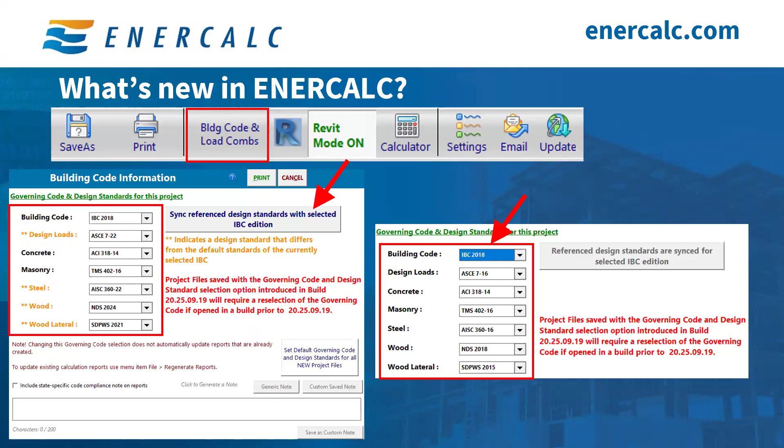Now keep in mind, all of the code changes we just talked about will only apply to the calculations within that specific ENERCALC file. If you want to apply this code selection as a default for all future projects, you will need to click on this button, which says Set Default Governing Code and Design Standards for all new project files. If you click this, you'll get a window showing the old default values and the new default values.

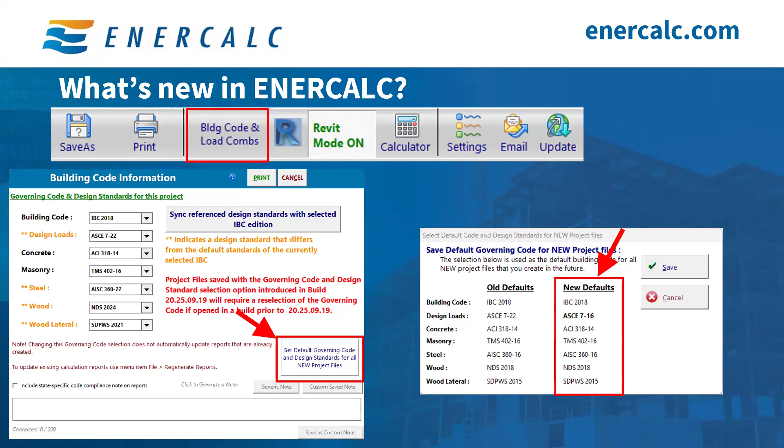For example, it used to be ASCE 7-22, that's the old value. The new value will be ASCE 7-16, and so forth. So if this is the new default you want to use for future projects, click on save, and that will confirm the selection and ensure this is the default governing code used for all of your future projects.

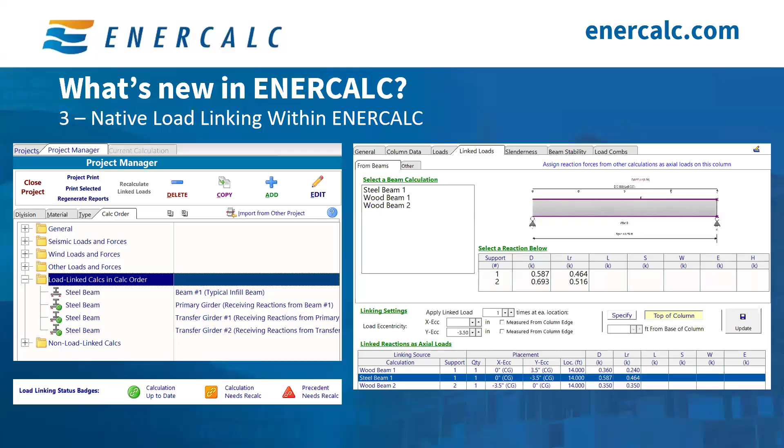Another update that's been really useful is the ability to export tabular detailed results from ENERCALC to a CSV file. This has been useful to a lot of engineers who want to post-process some of the results outside of ENERCALC. All you need to do is go to the results that you're interested in.

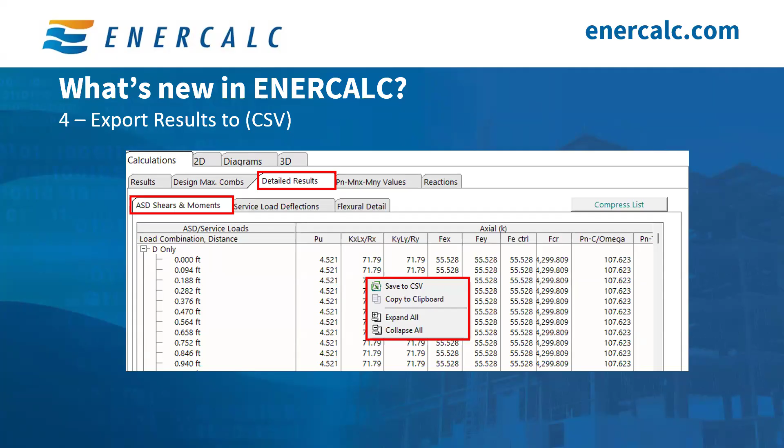So for example, you can click on detailed result, ASD shears and moments, and you just right click anywhere here and it'll give you the option to save to CSV to your computer. And once you have that downloaded to your computer, you can post-process it however you see fit. And this is available practically in all of our modules: columns, beams, slender walls, shear walls, foundations, and of course all of our analysis modules.

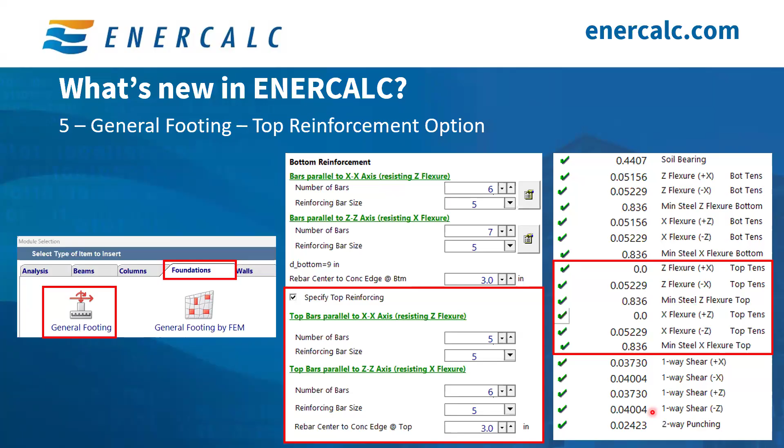So you can pretty much specify your reinforcement in the long direction and the short direction, both top and bottom, for a greater level of flexibility. And of course, on the right-hand side here, the calculations and results are displayed. You can see that we have expanded this quite a bit. So when we say Z flexure, it's top tension or bottom tension. This will make it a little bit easier for you to identify what type of reinforcement you need to increase or decrease and see what controls your design.

We also recently added full support for ACI 318-25. A few jurisdictions already started adopting ACI 318-25, including Georgia, I believe, in January. We're seeing this happen more often now, where a jurisdiction adopts a certain IBC edition and then handpicks newer editions of certain design standards. So you might be on IBC 2015, but the local jurisdiction wants to adopt ACI 318-25, for example, or ASCE 7-22. So again, with the mix and match we talked about earlier, you'll have a great level of flexibility to make sure that your drawings and calculations remain compliant with the authority having jurisdiction over your project.

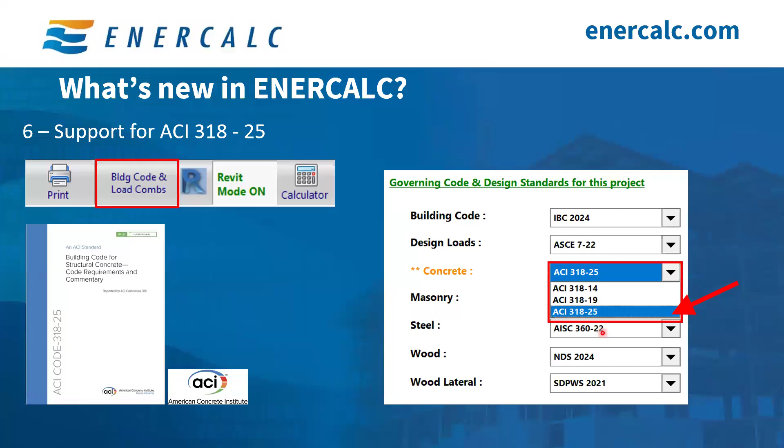But yeah, it's a very simple process. Again, you click on the building code and load combinations button right here, and you choose the ACI edition that you want to use for your project. And if 318-25 is the one that you've got to use, then you can simply select it from this drop-down menu.

With every new update to ENERCALC, we send release notes to outline what changed, what got updated and what got fixed. This gives you a quick idea about the top changes, so you can take advantage of the new features, know that certain bugs have been fixed, and maybe new capabilities were added. So this will give you a quick idea of whether the new build has some significant changes or maybe minor changes. So that's an easy way for you to keep track of that.

So moving on, the focus of our session today is the load linking feature and how you can use this powerful feature to link reactions from one calculation to another to form a well-connected and dynamic chain of calculations that follow the proper load path and reduce transcription errors, and more importantly, reduce the time wasted on manual entry of loads.

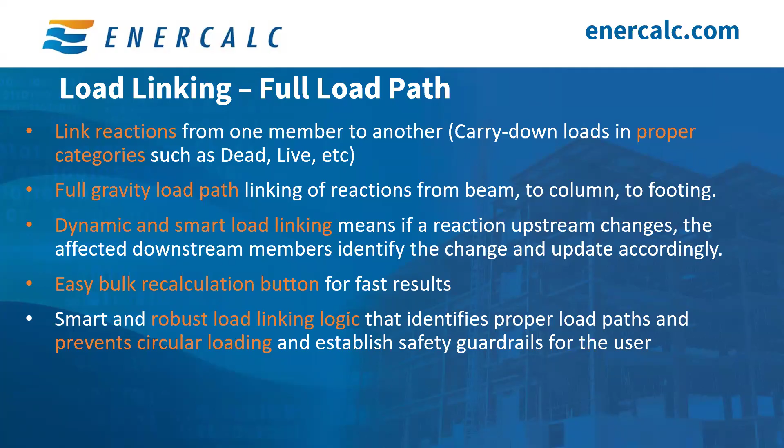Smart and robust load linking logic that identifies proper load paths, and this is very important. It prevents circular loading and establishes safety guardrails for the user. So it's not like you're taking a reaction from a beam, you put another beam, and then you're just going into this endless cycle of one beam supporting another with complete disregard to physics.

So with that being said, I want to take you today into an example that would showcase how this feature can be useful and how it can be implemented in your daily workflow. So the objective of today's session is to learn how load linking can help you manage tedious framing. The objective is to learn how useful and extensive the load linking feature is in ENERCALC, with the goal of you walking away with enough information to implement load linking effectively in your design workflow.

So we will not be focusing on how to create a new beam calculation or a new column calculation, etc. What we're going to be focusing on is how to use the linked loads tab inside each one of these calculations and how to link those reactions together. So first, I want to set the stage by walking you through the sketch so you have an idea of what we're trying to accomplish.

So on the left-hand side right here, we have steel girder number 1. This steel girder supports reactions from steel beam number 1, and it supports reactions from wood beam number 1. On the right-hand side, we have wood girder number 1. This wood girder supports wood beam number 1, but the wood beam now is really more of a joist at 24-inch on center. So that is the right-hand side of the equation here.

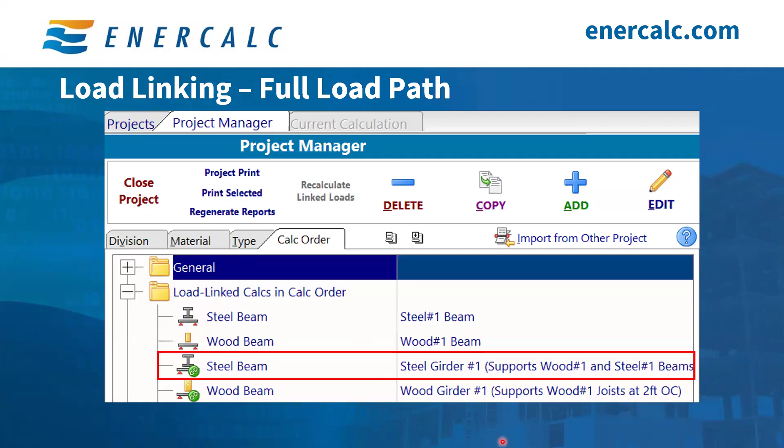So let's go ahead and open up the steel girder calculation to see what it looks like. This is a screenshot of the steel girder calculation specifically under the linked loads tab. You're going to find this tab in all of our calculations today, because that's where all of the linked reactions, or the load linking, happens.

On the left-hand side, you see a list of all of the beams that you can grab a reaction from. You can see here the first steel beam. You can see a wood beam right here. You can grab reactions from all these guys. On the right-hand side, you will see a 2D sketch of that selected beam. So I selected steel beam number one. That's what it looks like.

That's the loads on it. This is support number one. This is support number two. And you can grab whatever reaction you want. However, if I click on this wood beam right here, this sketch will actually update. Look at that. This sketch completely updates and it looks different. And the reactions are different.

So this 2D sketch is really helpful for us to jog our memory, figure out which reaction we want to grab, and make sure that we're actually grabbing the right beam. You can find the same style in all of our calculations, where there is a list of members to grab reactions from, and a sketch that helps you identify what you're grabbing and how to link it.

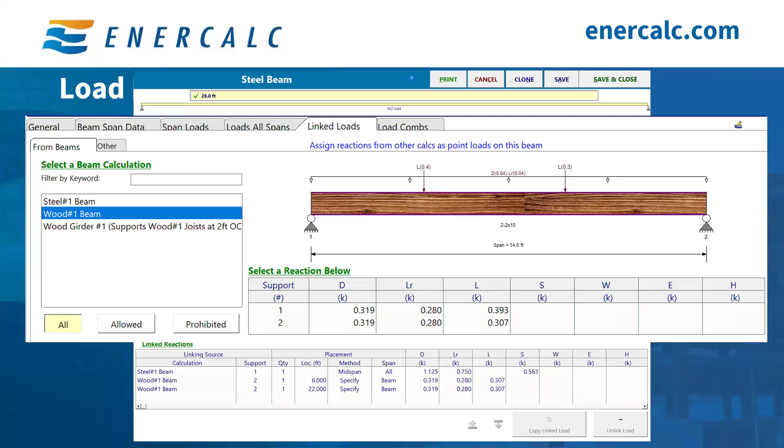So anyways, back to the girder design. We want to make sure that we're grabbing the steel beam here. And if you look at the very bottom right here, you have something called linked reactions. This is a table where all of your linked reactions live. It shows the source of each linked reaction or each linked load, and it shows how each load is applied.

So for example, the first load right here, the source of the first load is steel beam. You can see here that the method of placement is mid-span, which makes sense. We said that we have the first steel beam applied on the steel girder at mid-span, and then the second and the third, those are the wood beams, and their method of placement is a specific location. The first one is at 6 feet, and the second one at 22 feet.

And again, this makes sense. This is what we have here. The first piece is at 6 feet, and the second load, which is from the wood beam, is at 22 feet, and the steel beam load is at the mid-span. So that makes sense. All of the reactions have been linked properly, and you can see them right here that they have been linked and tabulated.

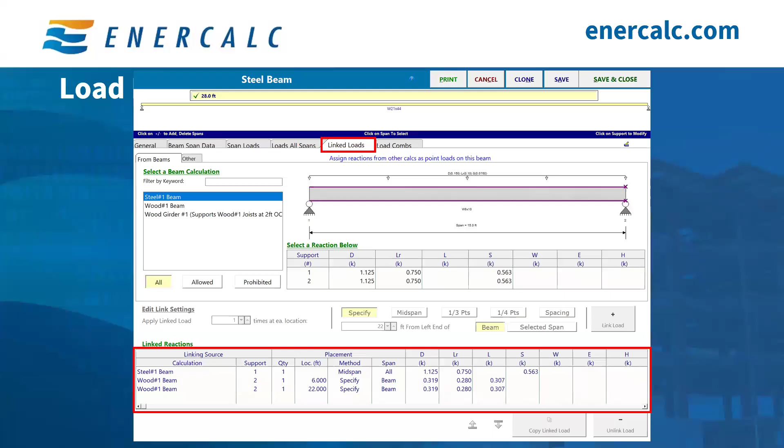And you can see that each linked load comes in as a full set of loads, which is the dead, the roof live, and if it has snow and so forth, or if it has floor live, all of that will be right there for you. So moving on now from the steel girder to the wood girder, which is practically the same thing. It has wood beams spaced at 24-inch on center. So let's take a look at what that calculation looks like.

If you open the wood girder calculation and you click on the linked loads tab, you can see here that we already linked; the source of the load here is wood beam. That's the first wood beam. And the method of application is spacing, and that means this is spaced. If you look at it, we have it starting at 0, and then the load repeats itself every 2 feet. And that makes sense because we have a joist at 24-inch on center.

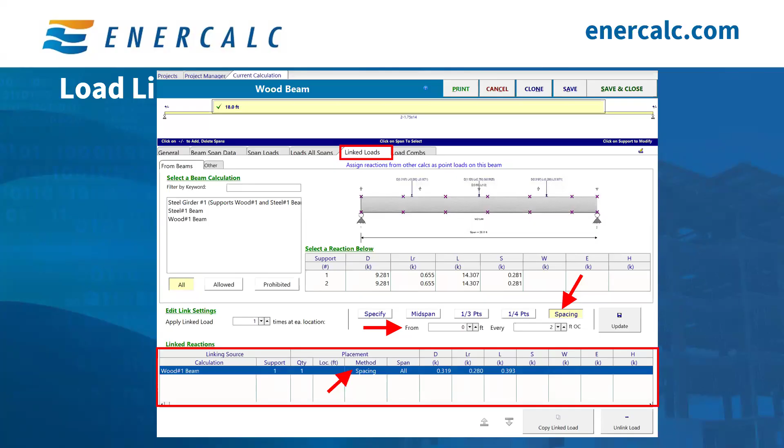So now we have linked the reactions from the wood beams directly into the wood girder at a 2-foot spacing interval as shown in here. Now that all the reactions have been linked into both girders, and the girders have been designed, you would go through your process, design what that steel girder looks like, design what that wood girder looks like, and you're done and you save and close. Now you are ready to work on the column, and that is the next piece right here.

So now we want to establish those links between the girders and the column. Again, the column is a 6x4, and it's oriented this way. And it has a lateral out-of-plane wind load of 4 kips, and it's at 9 feet above finish floor. So if you open the steel column calculation and click on the linked loads tab, again, the same theme, you will see a list of the beams that you can link a reaction from.

So we see all the beams that we have in the project, and we can grab a reaction from whichever we want. The list is shown on the left side, and on the right-hand side, you'll see the sketch. At the very bottom, you will see the already linked reactions right here. So the first source is the steel girder, and you can see that we have applied that load at -3 inches in the x direction. That's the x eccentricity, and it says edge. That means it's 3 inches from the edge of the column, not the center of the column.

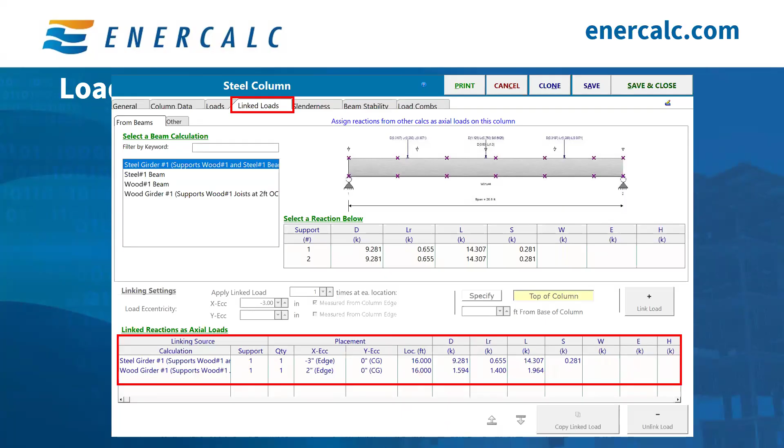So I always like to go and look at the 2D tab and sometimes the 3D tab just to see the visual representation of the load application. So for example, if you click on the 2D tab for this column, you will see the reaction. This is from the wood girder right here, and it says linked load. This is not a manually applied load. It says linked load, and it's at 2 inches away from the face in the positive direction.

And this one here, the reaction from the steel girder is at -3 inches away from the face of the HSS. So this visually looks great, and we're a lot more confident now in how the load got applied.

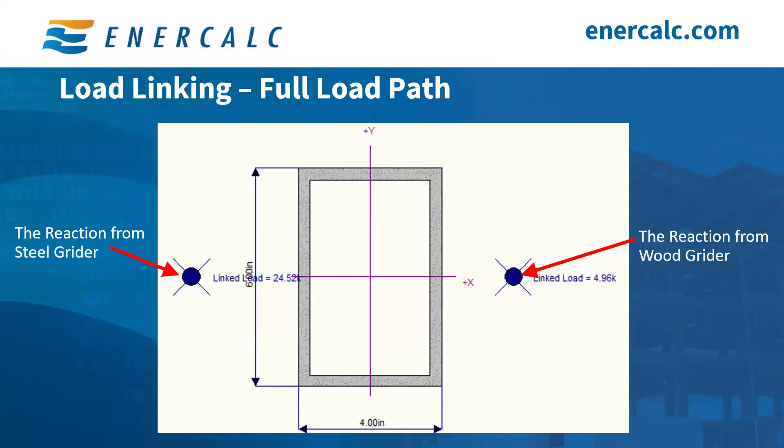Next step is to manually apply the 4 kips wind load, the out-of-plane wind load that comes from the wind girts. And I'm showing you this to let you know that you can mix and match. You can manually apply loads, and you can also have linked loads. So it's not like if you use linked loads you can't have manually applied loads. You can mix and match and do whatever makes your workflow easier.

So for this one, we don't have a calculation for that wind girt, but I know that the wind girt will apply 4 kips of wind load at 9 feet above the finished floor. So it's a simple process. You click on the loads tab, then you go to lateral loads because that's what you're trying to apply. And then from the drop-down menu, you need to pick the load type. Is it uniform load, partially uniform, and so forth? In our case, it's a point load.

I always encourage everyone to put a description of where that load comes from. I'm just saying lateral load from wind girt, but this is always a lifesaver for anyone who comes and reviews your work. They'll know the source of these manually applied loads that you're bringing in, and then of course you enter right here 4 kips for wind load, and then it asks you how that load is applied. We're saying it's out of plane, and based on the orientation that we have for this example, it's going to be parallel to the y-axis, and again 9 feet above finished floor. So we are good to go there.

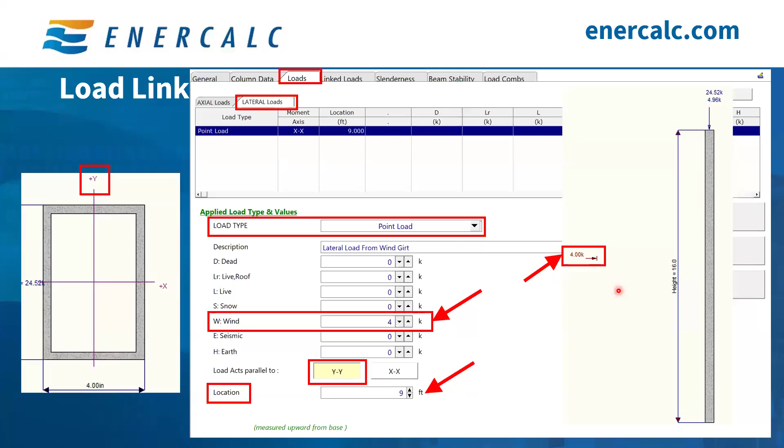And you can see here again, I went to check under the 2D tab. I was able to see the applied loads, and this is looking at it from this side, where you can see here the point load that's being applied. You're looking at it from here, and you're seeing the point load is applied horizontally, which is this one right here.

So now that we applied all the loads to the column and the column has been designed, again, you go through the rest of your typical process and you design the column, assuming that 6 by 4 works. And we are ready now to move forward to the footing. So we want to start a footing calculation and we need to link the reaction from the column to the footing. ENERCALC allows you to link the axial reaction from the column as well as the lateral reactions in both the x and the y directions, so the shear in the x and the y directions.

And of course, if you had any base moments in the x and in the y directions, all of these reactions are allowed, and ENERCALC links them. So this is a full reaction transfer, which unlocks the full potential, of course, of the general footing module that ENERCALC has. So in our case, again, it's a 6 by 4, and keep in mind the long dimension is like that.

So this is the 6 right here, and the 4 is the short dimension right here. If we open a new general footing calculations and go through your process, your soil bearing allowables, and you go to your footing data and all of that stuff, then you get right here.

We're focused today on linking loads. If you click on the link loads, you will see on the left-hand side a list of the columns that this project has. Currently our project has only one column, so that's why you're only seeing one right here.

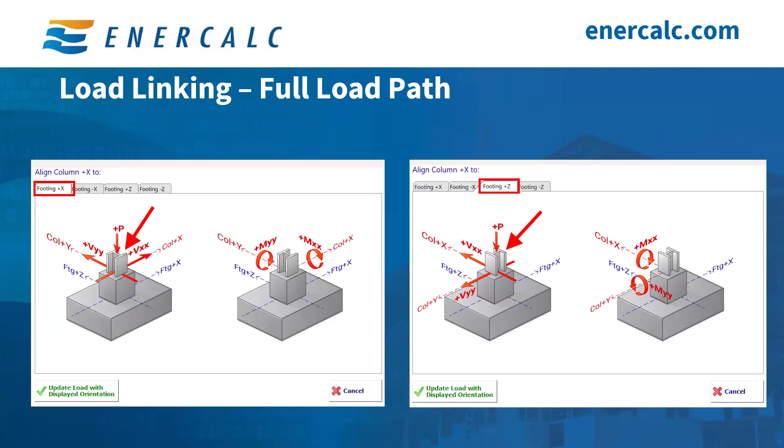It's very intuitive once you see these sketches. Once you get used to them a little bit, you'll be able to orient the column and the footing correctly. More importantly, you have the 2D and the 3D footing sketches that will always serve as a sanity check for you to make sure that you have everything oriented properly.

So for us, we're going to go ahead and move on with the footing plus X orientation. This means that the footing X dimension right here needs to be 6 feet, and this needs to be 4 feet. This makes sense now that the 4 kips wind load that's applied in the Y direction is right here.

It acts as a shear in the y direction, so that is perfect. Now, one more thing to note here: if you're experienced with ENERCALC, for columns we use X and Y as the directions. But for footings, the labeling is X and Z directions. This lays them on top of each other so you can reconcile them. As far as the X's, they're the same, and the Y is really the same as the Z direction.

They're positive Y or positive Z, they're exactly the same. So now that you have a good understanding of the orientation, we're good to go and can move forward. Just make sure that you remain consistent with whatever you end up choosing.

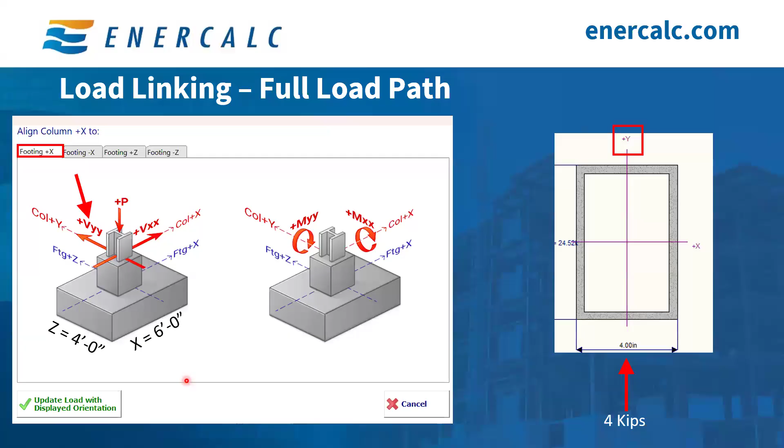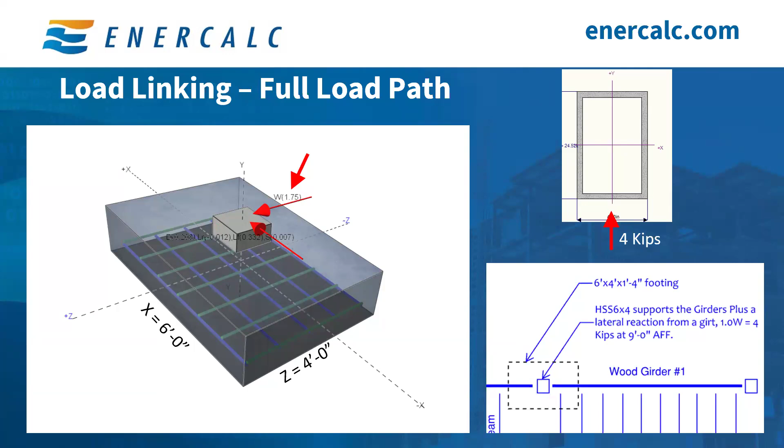For another sanity check, I recommend checking the 3D tab to see the 3D representation of the foundation. You can see right here, this is the 6-foot dimension of the footing, this is the 4-foot dimension of the footing, and this is the application of the wind load, the point load, which is accurate. It's pointing in this direction, towards the positive Z direction. So again, that tells me everything is proper and we got everything oriented correctly the way we want it.

So now that we have a fully connected chain of calculations from the first most upstream beam to the girders, to the column, to the foundation, your work here is done and you're good to go.

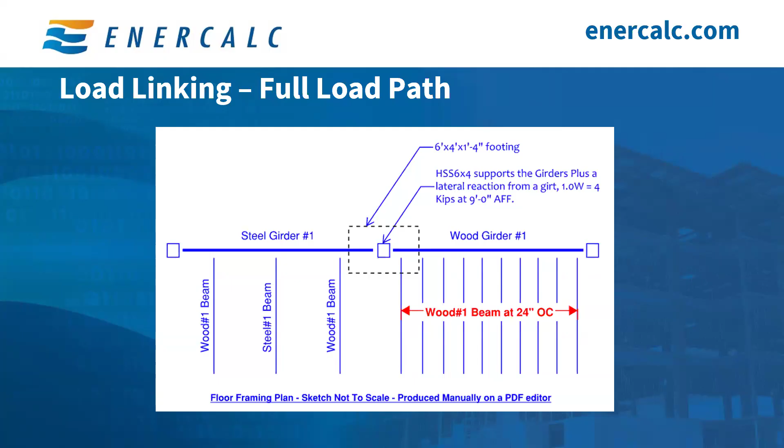But sometimes, maybe a few weeks down the road, you realize your work is not really done, and now you need to design the wood beam to take a heavier dead load. So that means things are changing. If this wood beam is now taking different loads, then the wood girder is changing, the steel girder is changing. Well, that will affect your column. So now your column is going to change and your footing now is going to change.

And this change doesn't mean that you have to change sizes. This change just means there's a change in reactions. You will have to go through it again, reevaluate it, and see if that warrants a size change or not. This is an extremely tedious and manual process. However, ENERCALC makes this a much more manageable, and dare I say, simple and fun process by using load linking.

So as soon as you change the loads in the wood beam, ENERCALC flags all the affected members. Once you change this, all of the affected members downstream will get flagged.

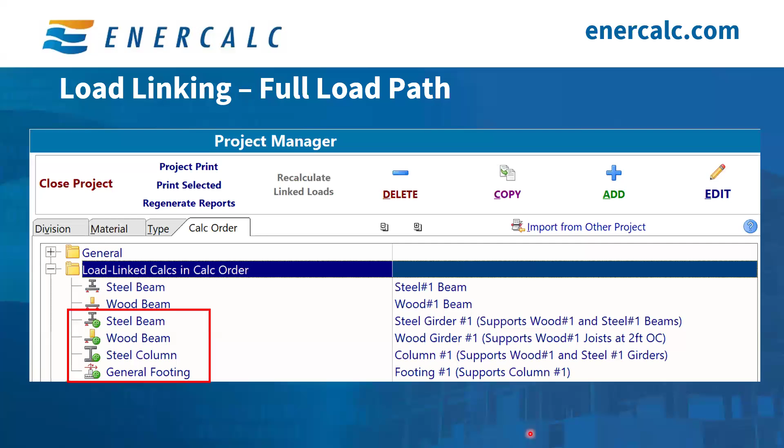You'll have to make sure that it still works. But at least you don't have to worry about tracking the different reactions, what changed, and carrying it downstream. This green indicates that your reactions are linked and up to date — you don't have to worry about outdated information or outdated loads. You will still have to be responsible for checking the member design and member safety.

So in summary, load linking is such a useful and time-saving feature that allows the user to live link the reactions from one member to another. Currently, ENERCALC load linking is supported in wood beams, steel beams, wood columns, steel columns, and foundations.

Our implementation of load linking is truly a reflection of what our users told us. We keep track of how many times a feature is requested, and we prioritize our development efforts based on the demand we receive from our users. This is why I want to encourage everyone to take this short survey to let us know where we should implement the load linking feature next.

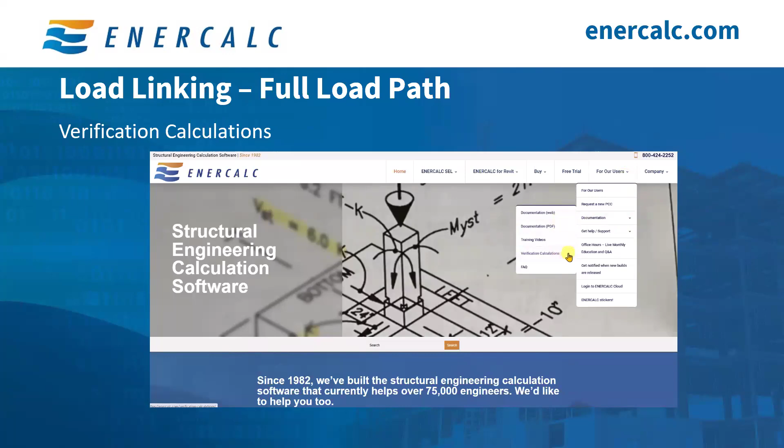So you click right here, and then verification calculations right here. We will continue to update this page with more verification examples as we produce them. You can see that we already have about 6 verification calculations for 6 different modules.

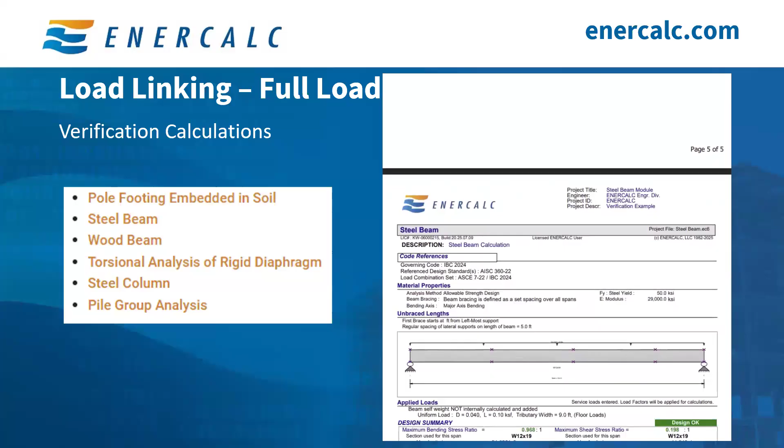We made that available on our website. This will help our users check our design and make sure that ENERCALC performs as well as expected: compare the hand calculations based on the ENERCALC report results and make sure that everything is to their liking. These verification calculations can also serve as a great learning resource for young engineers and a quick refresher for those who need it. We plan on continuing to add more verification calculations to cover more modules as we go.

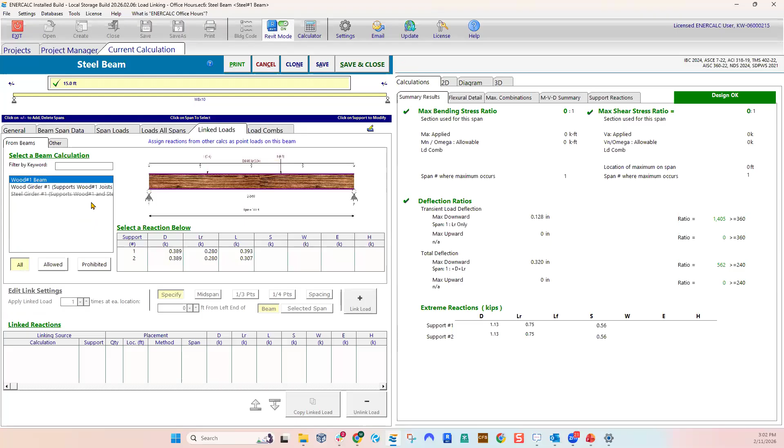The only reason steel composite is not supported right this moment is because of the sequencing issues that go into composite, because you have pre-composite, post-composite, and all of that. It's not the same low-hanging fruit that your regular beam modules are. And so in our development work, we prioritized beams that don't have that extra complexity in the loading. That's not to say it's not going to be supported in the future. Good question. And Mac is showing you guys that survey right now.

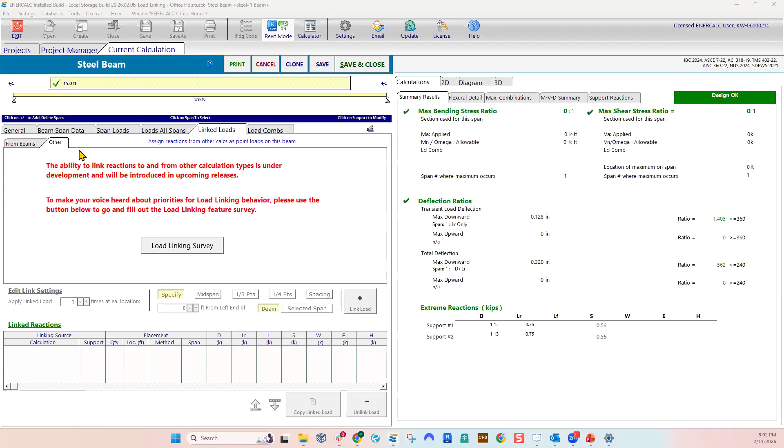All right, next question. When a beam reaction is changed, do the downstream members update automatically, and will the downstream calculations be flagged if they now fail? So hopefully Mac touched on this topic for you and got you some clarity on this, but I'm going to let him go ahead and revisit this in real time in front of us here.

Yes. So you can see here everything is green. And again, green means that the reactions that we have linked are all up to date. So if I go to the wood beam right here, and if I change the load, let's say I'm going to change this dead load to 20 instead of 25, and I click save and close.

And what happens is that you will see that ENERCALC will automatically flag these calculations because all of these calculations, from our example, they're all dependent on this wood beam right here, on the reaction from the wood beam. And you can see that we have the statuses right here.

This means that the calculation needs to be recalculated, and that means just the preceding member, which the wood beam here is the preceding member that changed. And the steel column and the general footing, they're saying that there is more than one member upstream that is affected by this change. So you'd have to fix them one at a time.

You can fix them one at a time by opening each one and doing the work, or you can just click on this right here, which is perform a bulk recalculation. And what it does, it will rerun through the logic, figure out what changed, grab those reactions downstream and apply them. And then finally, once it goes through all of them, it will turn everything into green.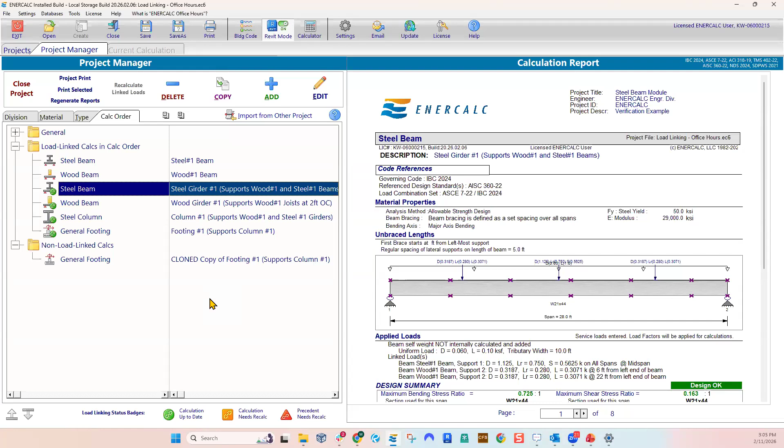All right, next question. While doing load linking, do we need to add dead load and live load in span loads? So I'm not 100% clear on what's being asked, but there's a couple different ways we can approach this. When you perform load linking operations, as Mac showed us today, the load has to start somewhere, and that often comes from a beam calculation all the way at the top of the load path that doesn't have any linking on it, but its reactions become the source that you then link downstream.

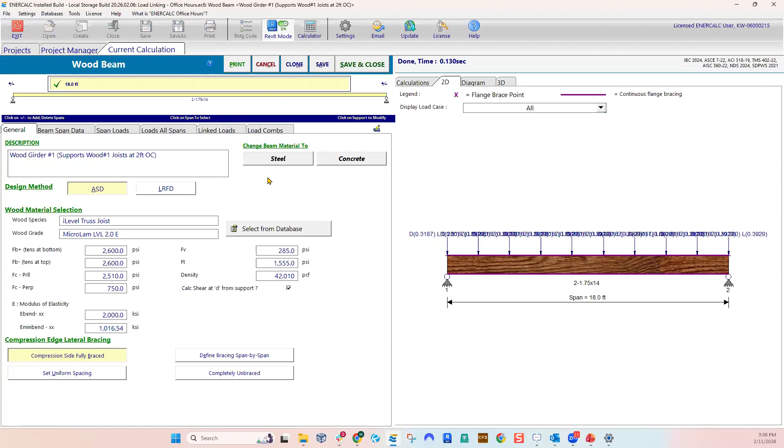So the calculation at the very top of your load path is going to have to be loaded manually. That can be done through any of the conventional means you've always used in ENERCALC calculations: your span loads tab, your loads all spans tab, and so on. You also have the option to auto add your beam weight to account for dead load. Then the reactions generated from that calculation, which you would have formerly transcribed manually, can now be transcribed automatically by going to a downstream calculation and linking those reactions.

So feel free to ask a follow-up question if there's something we haven't answered for you. But Mac, go ahead if you want to take a shot at addressing that particular question. Yes. To make sure it's clear, you have this wood beam and you have a wood girder. The load that's applied on the wood beam is a manually applied load. The load that's applied on the wood girder is linked load from these wood beams.

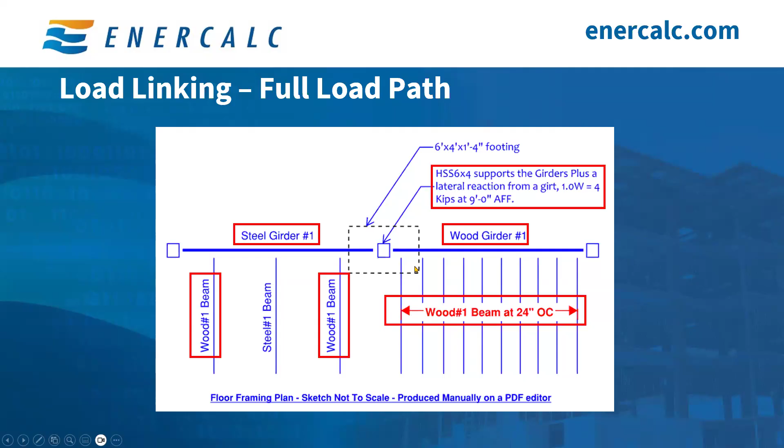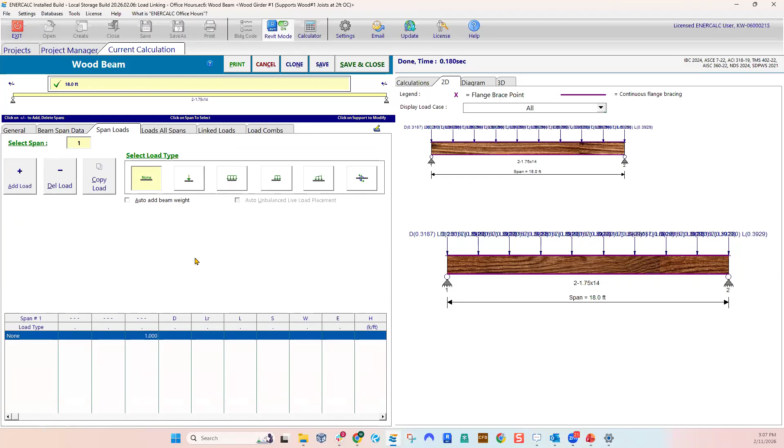So with this in mind, if you go back, this is the wood girder right now. All of the load that you can see here comes from load linking. As you can see, in span loads I have nothing, and in loads all spans I have nothing. I'm not saying that you can't have something, you can, but I'm just not adding anything here. All of that load comes directly from the linked reactions from those joists.

However, now let me go back to the wood beam, and that's the most upstream member. If you click on this one, it doesn't have any linked loads because this is the first member. Nothing is linked to it, so that's why there's nothing here. And that load comes directly from the manual application that we're typically used to. So that's how I have this. The first member has manually applied load, and then the rest of them just have linked loads or linked reactions.

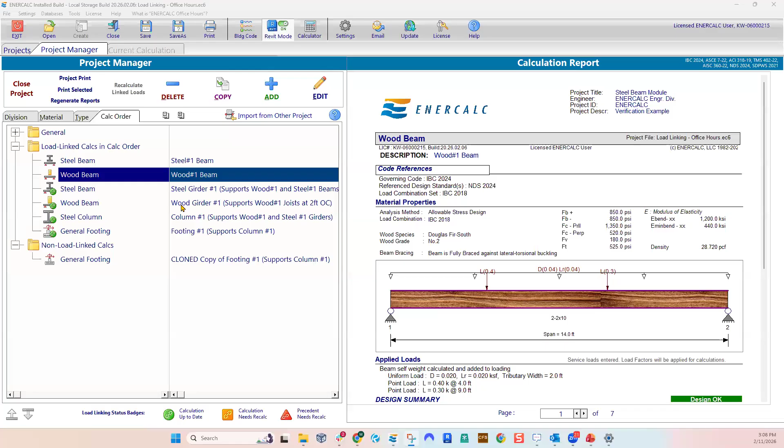All right, next question. Could you develop something similar as you did in the linking load search box? Ahmed, I'm not 100% certain on what you're asking there, but feel free to ask a follow-up question if there's something we can answer for you there. Mac, I believe you did briefly cover the use of the load linking search box for keyword search for easier navigation of your linked loads. Yeah, and I can actually go through it. Here, let me go through it because it's a great feature to dwell on for a second anyway.

Yes, absolutely. So nobody has a calculation for a whole building that just has two beams, or most of the time that's not the case. Most of the time you have 10, 12, 13, 15, even more calculations, and sometimes the names all become the same, or it's kind of hard to navigate.

So for example, this list right here only has three, but if I specifically want the wood beams, I can just type wood, and now that'll show up here, saying this is right here and this is right here. I can do wood number one, beam, and now it's filtered. So if you have 20, 30 calculations, 20, 30 different beams, for example, you can easily just filter by keyword right here to make your life a lot easier. Fantastic.

All right, next question. When choosing governing code, should load combination directly sync with it so I don't have to do it manually? This is a classic example of a 50-50 design decision where ENERCALC has to try to be as helpful and as neutral as possible, because workflows and opinions typically tend to divide down the middle with those kinds of things. And so we don't want to overly couple those settings, because it's not 100% true for us to assume that all users want load combinations to follow the governing code around everywhere it goes. Mac, if you have anything to add on that, go ahead, or we could briefly visit that window if you have thoughts.

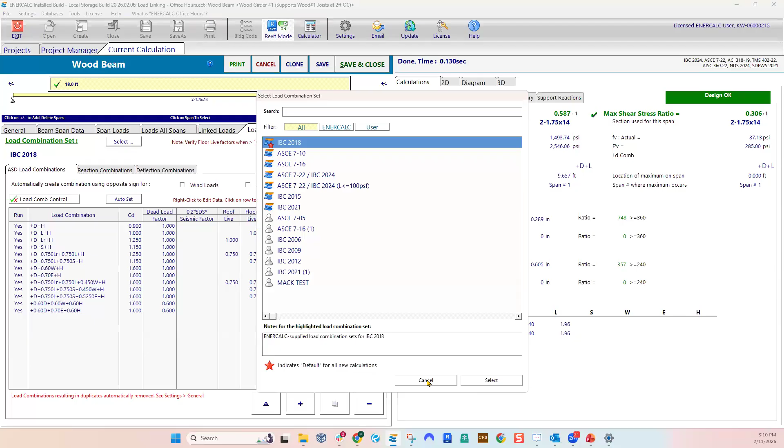Yeah, and just want to make sure I understand. They're talking about the ability to control load combinations separately inside here, as well as a default value, correct? Well, they're saying why doesn't load combination automatically sync with your governing code, basically. Yeah, it's a flexibility thing, I think. Exactly, I agree with you. It's 100% a flexibility thing, because if it does sync and then sometime you want to change something very specific to a specific calculation, maybe a different set of combinations, if we lock it up here, I think we'll get complaints about that.

Absolutely. All right. Now, I just want to briefly mention, ladies and gentlemen, that we are in the presence of greatness today, because the one and only Michael Brooks is in attendance in our office hours session today. For those who don't know, Mike is the founder and creator of ENERCALC. He's the father of ENERCALC, and we owe an awful lot to Mike for all the amazing work he did over the years. So everything you guys enjoy today, we're standing on the shoulders of giants, because Mike created ENERCALC from nothing and made it what it is today. So thanks for dropping in, Mike. Great to hear from you.

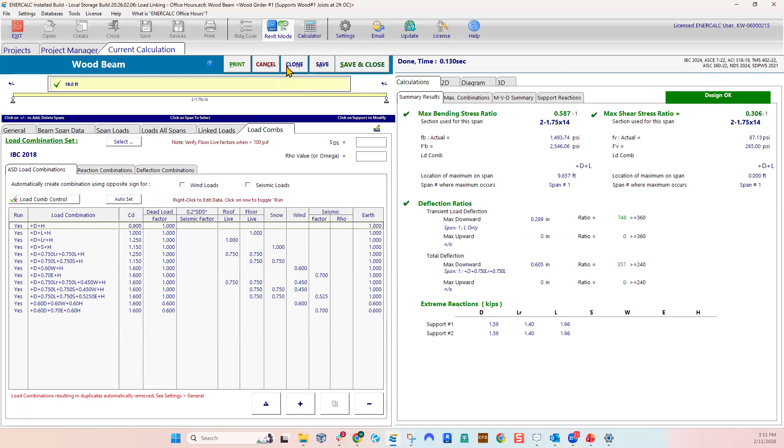All right, next question. How can we submit a request to separate linked load member options by division? So as always, I know we mention this from time to time in each session, but you can always send us a feature request. Support at enercalc.com will get you to our engineering team to log those.

It sounds like in this case you're talking about additional ways to view or separate what's going on in the project manager. Right now we have just the original three ways that you can view, and then we have the calc order tab. So it sounds like you're talking about the ability to break out by divisions and then rank each individual division by linked load order or something of that nature.

Feel free to reach out to the support team if you have more detail about what you'd like to see there. Go ahead, Mac, if you had something to add. Yeah, I'm not sure I fully understood the question, other than just kind of separate them, I guess, in divisions. Yeah, that looks like it's more of a feature request.

All right, next question. Why not show that a member... Oh, go ahead, Mac. Sorry, I want to get back to one thing here because I want to make sure to touch on this with load combinations.

So if you're working, for example, on IBC 2024, or whatever IBC you're working on, you do have the ability to have a default set of load combinations that you want to use for every project. That would be the default that shows up every time you open a calculation. And that could be it for the person who just asked the question, because this way it'll be synced to that. What I'm trying to get at is that this does not control your load combinations. This is the one that controls it.

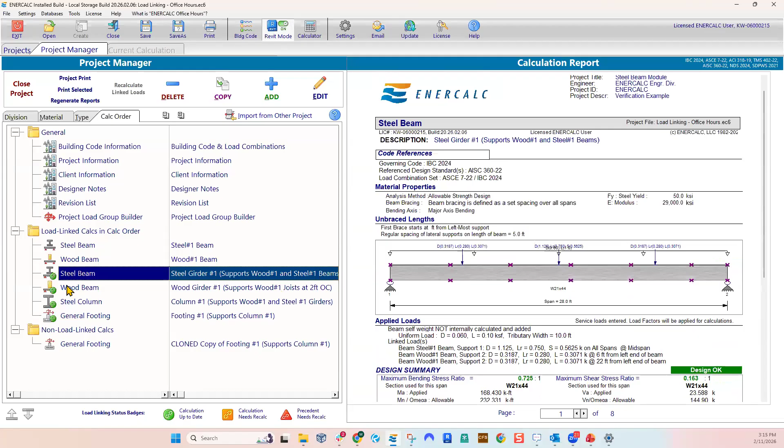All right, next question. Why not show that a member passed or failed in the summary dashboard of the project manager? So, like Mac said, there's an important difference between the badging that represents whether you're using the latest greatest loads versus a pass fail status. When it comes to recognizing pass fail information, ENERCALC has always leaned on having those reports available. As you can see, when Mac cycles from one calculation to the next, he's able to view those reports.

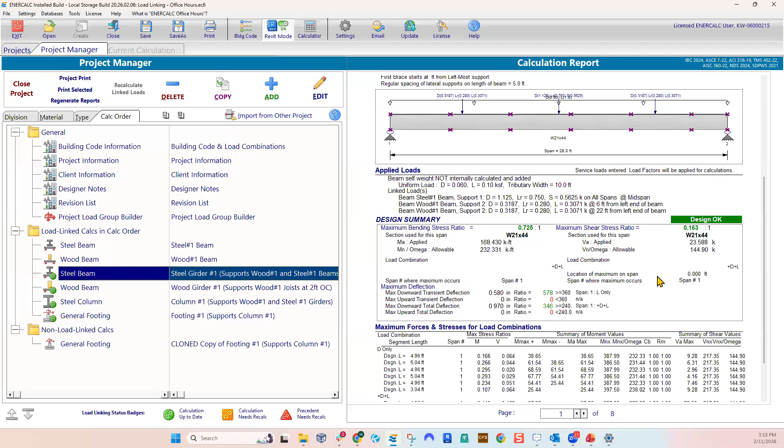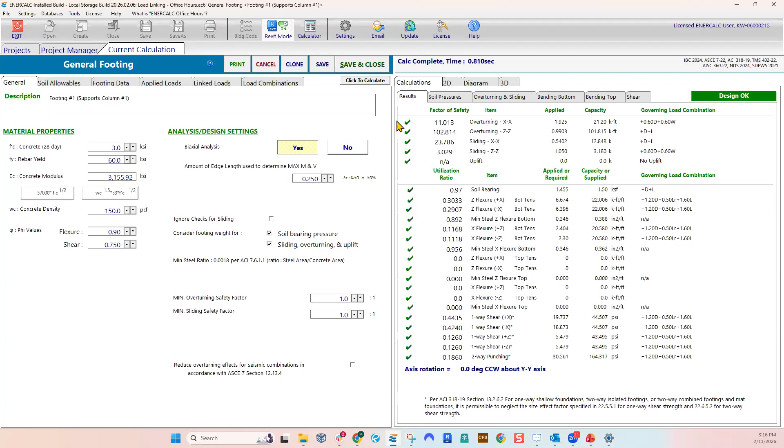It's not always possible to provide a succinct pass fail status for every kind of ENERCALC calculation. General footing is a great example, because it checks multiple limit states: sliding, global overturning, soil bearing. In a biaxial analysis, you have soil bearing about two axes, sliding in two axes, and so on. That's why ENERCALC has always emphasized making the report available in the project manager view, rather than trying to indicate some sort of universal pass fail.

All right, next question. Mac, I know you know the answer to this one. What about load linking for ENERCALC for Revit? Yeah, ENERCALC for Revit is a fun one. Go ahead. No, you go ahead, this is your baby.

Yes, ENERCALC for Revit actually has native load linking capability, which completely predates load linking in ENERCALC itself, and it's a different framework. Load linking in ENERCALC for Revit is available. It's very feature rich and intuitive. It does not cross over or interact with the features Mac was demonstrating today, because ENERCALC for Revit existed before this load linking framework was developed.

So the function and behavior is identical. It's very seamless and intuitive, but it's all happening spatially in the 3D environment, instead of the process we saw today where Mac manually takes this reaction and puts it on this element at this location.

All of that is done on the fly automatically in Revit when you're using ENERCALC for Revit because you can actually physically determine those relationships by proximity, location of intersection, support relationships, and so on. So, for example, when you have a system of infill beams on a girder, on a column, on a footing, all those associations can be built on the fly and managed very easily.

So yes, all those features do exist in ENERCALC for Revit. One distinction actually is that steel composite load linking does exist in ENERCALC for Revit at this time, and so you can link wood beam, steel beam, steel composite beam, girders, columns, all the way down to foundations.

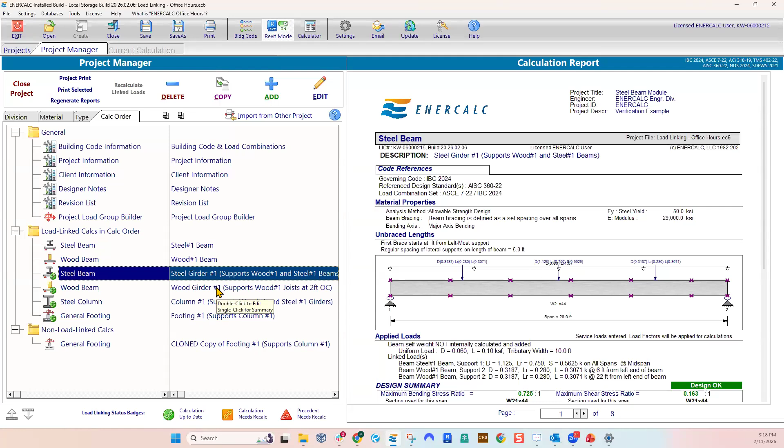All right, next question. How could we do if load linking starts at a certain point from support and ends at some distance with some spacing? So the spacing feature that we have in load linking, and I'm sure Mac wants to get in and show this, has a start point. It does not have an arbitrary end point. And so if you need both an arbitrary start and a stop, you might be better off placing individual specify loads because the spacing is going to be indefinite until the end of the beam.

But the nice thing about load linking is it is not a one-to-one relationship where once you've linked a reaction, then that's all you can do with it. You can take the same reaction from the same calculation and link it multiple times on multiple locations across that beam. And so between the specify and the spacing capabilities, you have some pretty nice flexibility to get in there and create those. The only exception being you can't designate an arbitrary stop point for a repeated spacing.

Absolutely, yeah. And I want to emphasize this because this is really important. This is wood beam, and this is reaction one from this wood beam. And I linked it the first time to be applied at third points, which is this one and this one. And then I decided that I'm going to link it again at midspan. And I can turn around and grab it yet one more time. And maybe I want to apply it at 2 feet from the left-hand side, and I can add it here.

So this is definitely not like once you link it once you're stuck and you can't link it again. You can link it as many times as you want. Now to get back to the other, I just want to show here the spacing. What I can do, as you said, we can determine a specific start point, but then the end of this will be at the end of the span.

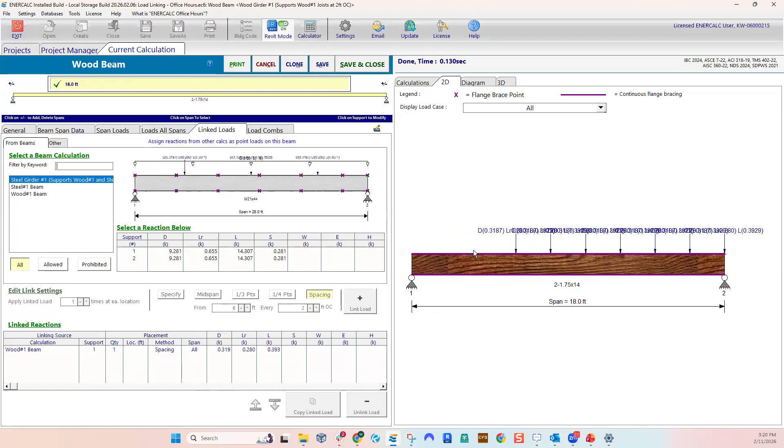So I can say, I want you to start at 6 feet from the left-hand side and then repeat every 2 feet. And you do this, leave this empty, and it'll go all the way down here. We can do the same thing and say maybe from 10 and do it that way. However, the end point has to be at the end of the span. It cannot be an arbitrary point.

In that case, you might end up having to apply the load manually and say, okay, well, I have this load at 10 feet, and then I have the exact same load again, but I'm going to put it this time at 13 feet and so forth. So it's a slightly manual process, but you can do it that way.

And one other thing that I really, really love about all these load controls for load linking, especially on beams, is that all of those relative location tools that Mac was pointing out, meaning the midspan, third points, and quarter points tools, are all dynamic relative locations for those loads. And so if you establish the span geometry and then you go, hey, we've got midspan or third points or quarter points,

if you then later down the road go and change the span geometry for that particular span or for an entire beam, all of those point loads are going to dynamically update and they will remain at the appropriate span relative locations. So it's not like once you place a load at midspan, then if you alter the span length, that load remains off center and has to be manually corrected. Instead, those all remain always applied in their proper locations.

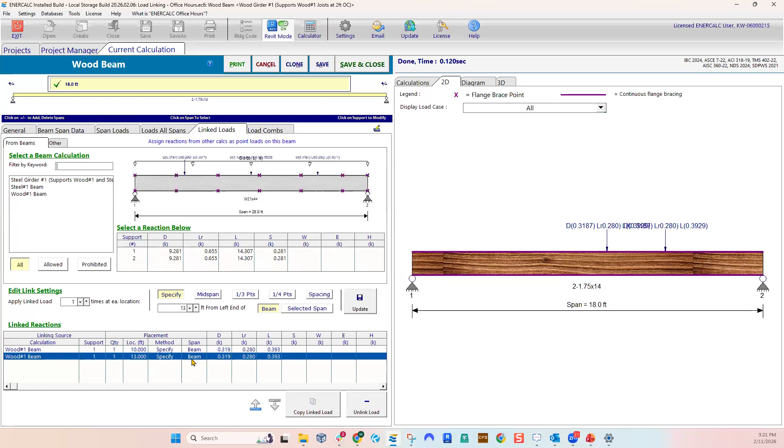Next question, this is a follow-up from Ahmed about a keyword search filter navigation feature for the project manager, similar to what we have for load linking. That would be a fantastic feature request to pass along to the engineering team, especially for larger projects where you have many calculations.

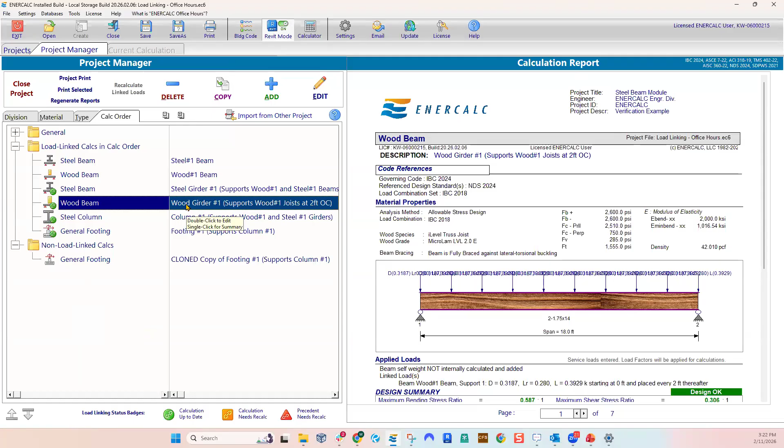Next question. Is it possible to pick specific load types or reactions from a linked member, or does the linked load collect all reactions from a linked member? You probably saw when Mac was going through that workflow, you pick a specific reaction. Right now we don't give you the ability to cherry pick individual cases from that reaction. If you pick support one or support two from a particular beam, you're going to get all the cases of the forces that occur at that reaction.

But you do have the ability, for example in a multi-span beam, to choose which specific support location you're taking and linking onto your new member. Because ultimately we're treating these like point loads, and a point load would be a discrete reaction location. If you were to do that with a column, that's going to bring all the components, meaning shear in two directions, moment about two axes, and the axial force as well. So within a certain reaction, we don't allow you to cherry pick certain components or cases, but you do have the ability to designate a specific reaction you want to work with.

Go ahead, if you wanted to elaborate on that. I want to make sure that once you pick the support point, you're grabbing everything associated with that. That means if there's axial, shear, and moment, you're grabbing the whole thing. You cannot cherry pick, there's currently no way for you to say, I just want the shear in the X direction but not the rest of it. You can't do that. And the same for load cases, you can't say I just want to grab the dead load portion and leave the roof live out, for example. You're taking the full reaction.